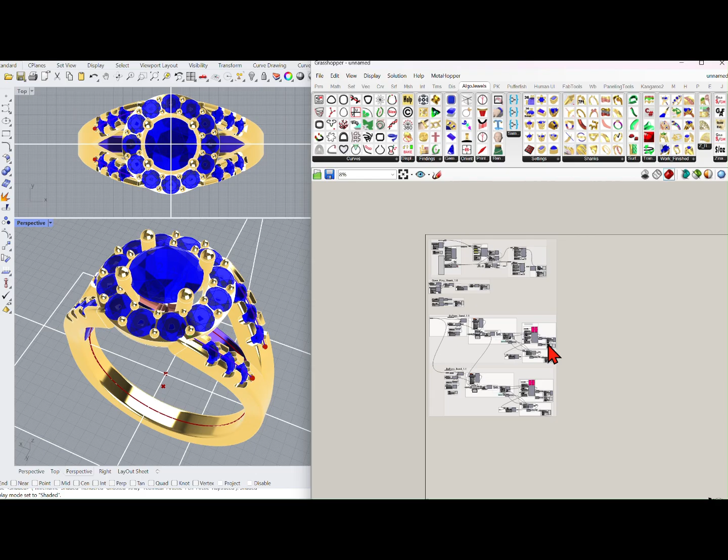So right now you already know how most of this goes. So let's start by shutting everything off.

Right, there you go. There's one side. There's the other side.

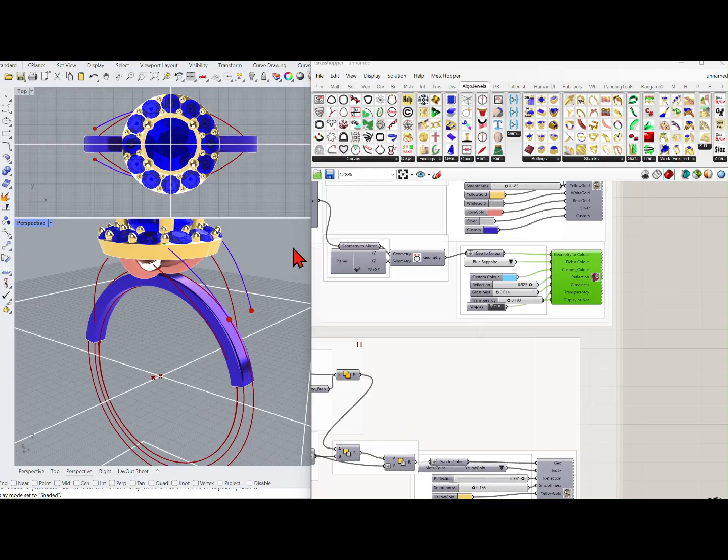As we go up the ring, the opening, there's the under pieces.

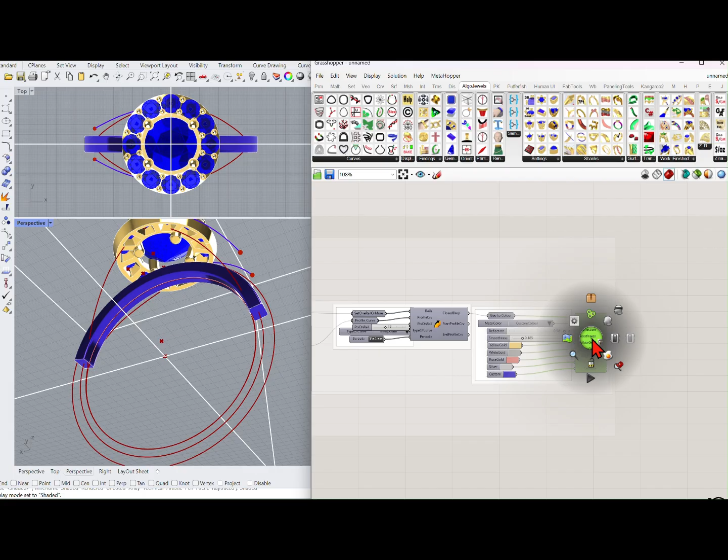There's the ring. So this top portion is the halo. We have a round brilliant stone right now.

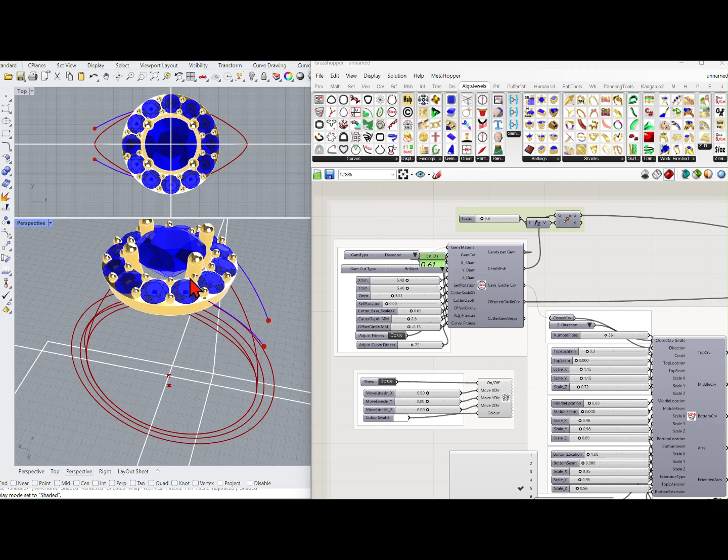And we have moved the mesh up. We can move it slightly down if you want, using this, where you want it.

Now let's go 7. Okay, 6 by 8.

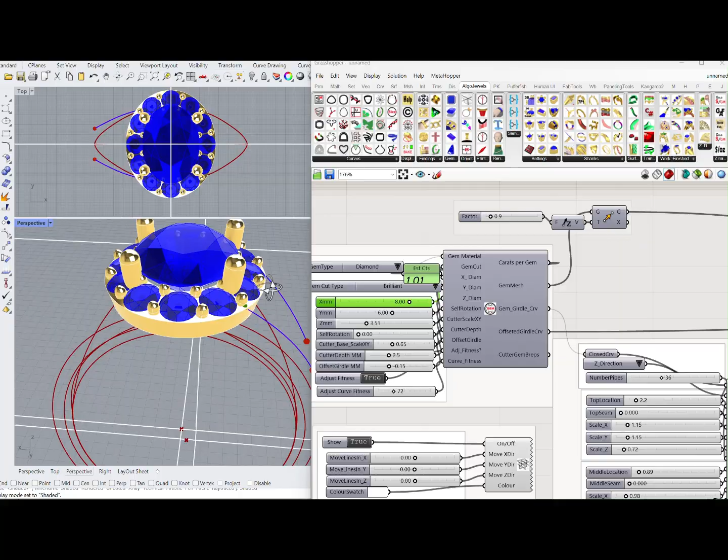And you can turn the wires off. We must have it another time in here as well. That's fine.

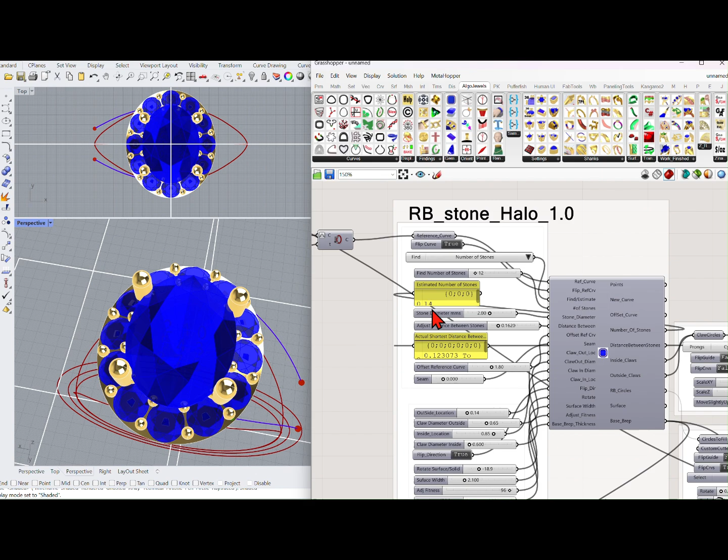And we're forcing 12 stones. Number of stones: 12. Let's go number of stones. And these are 2mm stones, 1.5mm stones. And let's go 18.

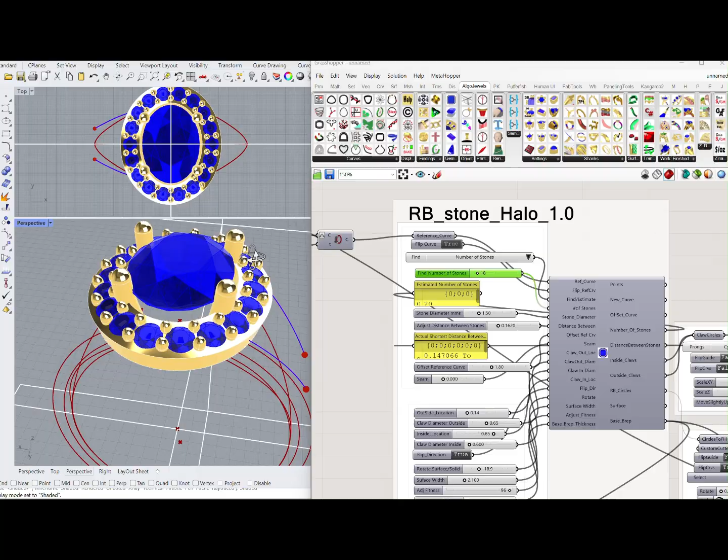There you go, that don't look too bad. And you follow it all the way through.

We're orienting to the top of the ring. Orienting to the top of the ring.

And we're changing the color to ruby. So those are all the gemstones. You can change the top to white. And those are all the pieces.

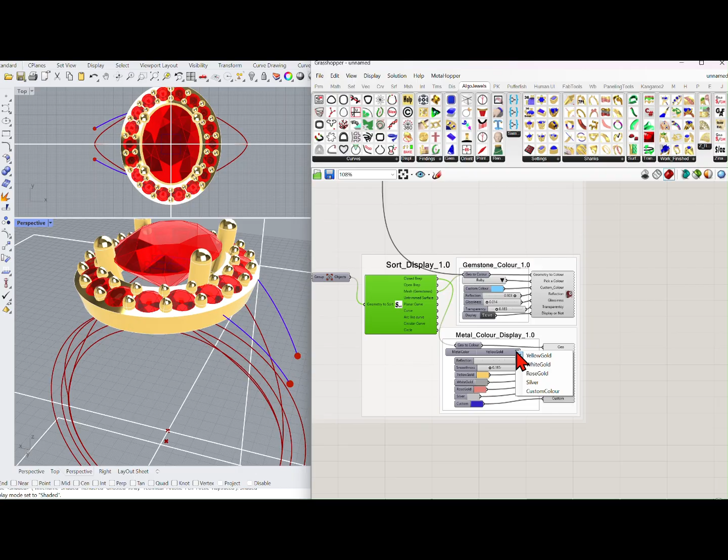So there's the halo. There's the underwire.

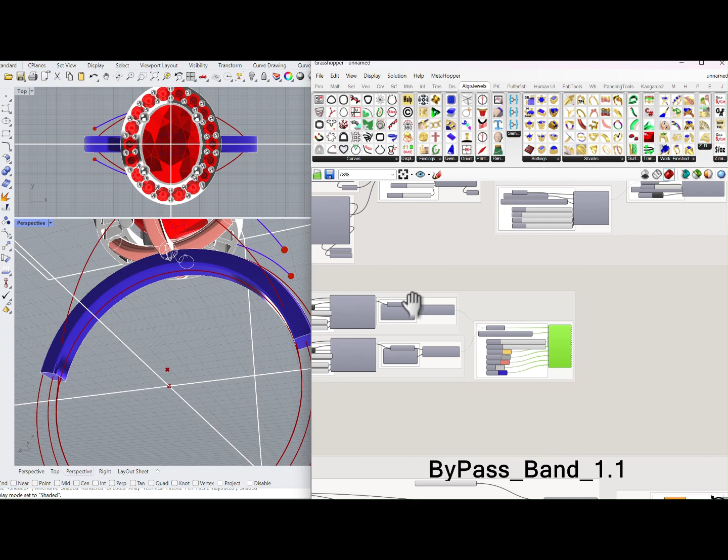There's the curves underneath. How they're made is with points, or piping points, and you can move these points if you want.

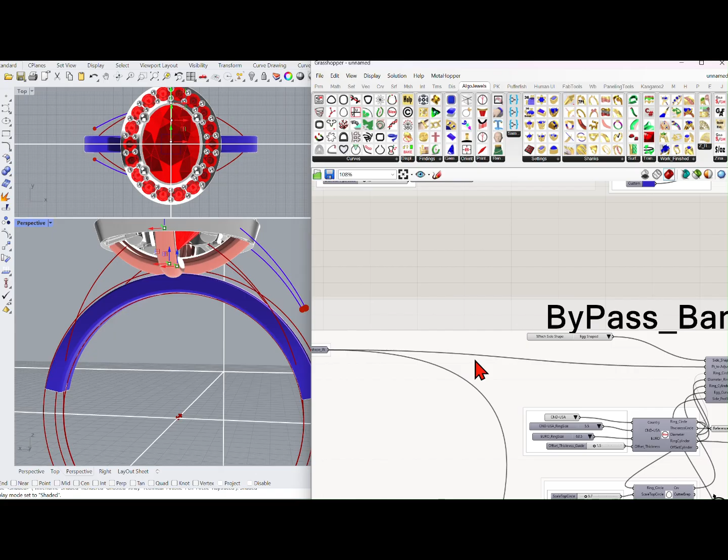And we have a bypass ring here we're using, and we're using these points here to make the bypass ring. So we can adjust these points if we want now.

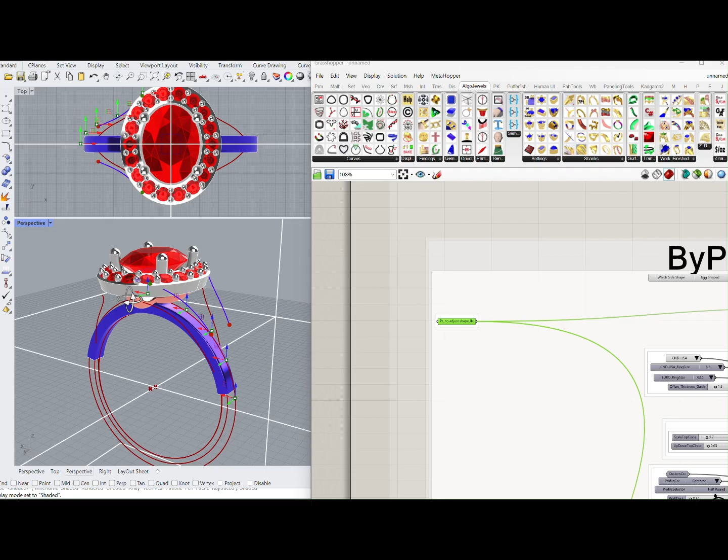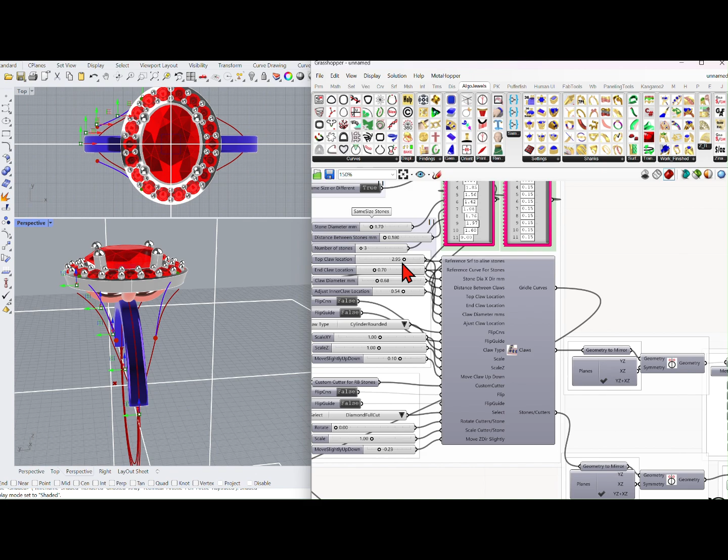And it's creating the bypass shank. We're adding the diamonds. Number of stones: 3. It's 1.7mm.

There are the stones. There's the shank. Now to clean that up.